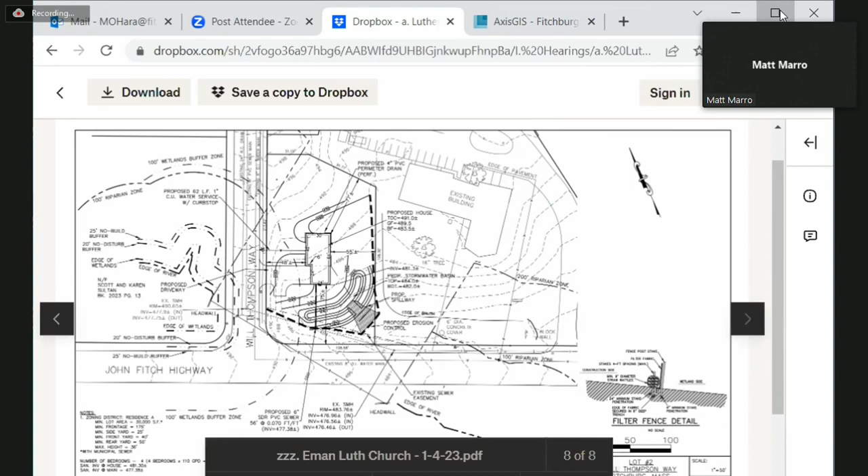At that time, I believe Mike was there also. And then members were there? There were some members - myself, Mark, Dr. Baker, Ralph. So there wasn't a quorum there? Correct, it was not. Okay, I just want to verify that.

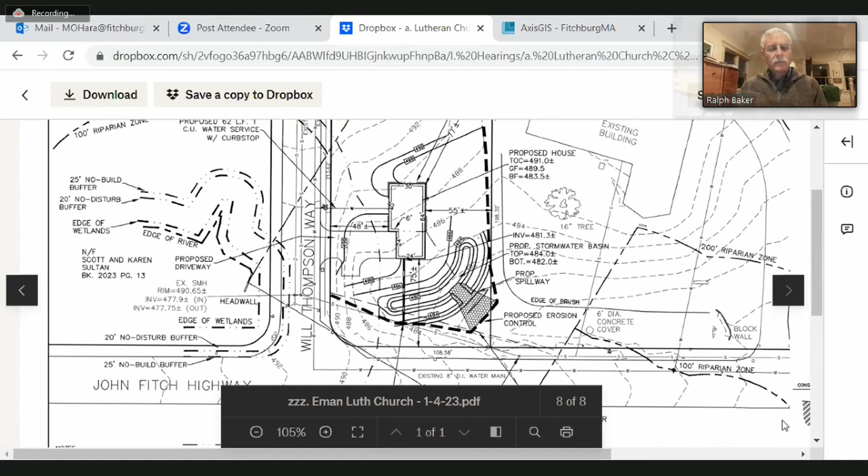I know at that point they had a site walk with the members stated, and Matt and Tim, and in both times Matt visited the property, he did some hand augers to check the soils, to see if there are hydric soils on the property. Tim, at his initial site walk, stated there was some wetland vegetation he had concern about. So there was some back and forth with regards to whether or not there are wetlands there. We did not update our plan to show any additional wetlands on the property, as our consultant, Mr. Marro, does not believe there are any further wetlands on the property that affect this project.

The other item we had to take care of since the last meeting was the stormwater management rules and regulations that the city has. We've been in contact with Nick Erickson, the DPW director, back and forth. I had a lengthy conversation with him this morning to go over a disagreement we had with regards to whether we needed to meet those requirements, because one section says if you disturb less than 20,000 square feet, you do not need to meet the requirement, which we do not disturb greater than 20,000 square feet.

There's another section in the regulation that basically gives the city carte blanche over any disturbance in the city that impacts drainage or waterways of the Commonwealth. So any disturbance that happens in the city, there's a provision in that regulation that Nick says allows him to require us to do stormwater management, even though we don't have 20,000 square feet of disturbance.

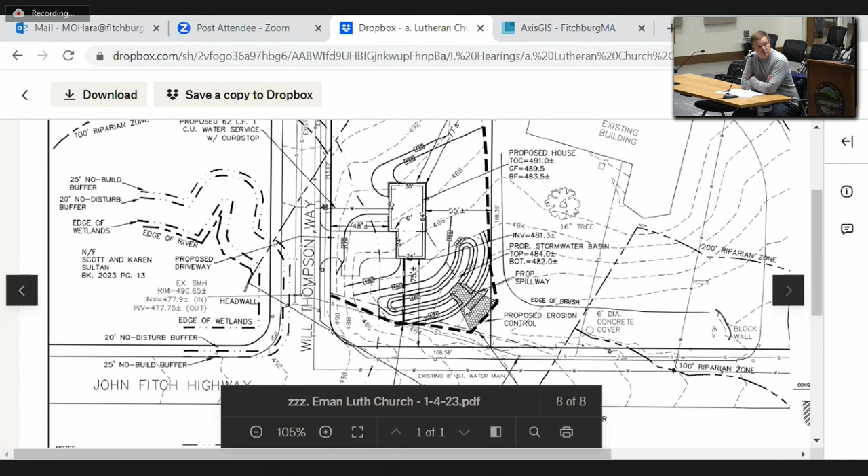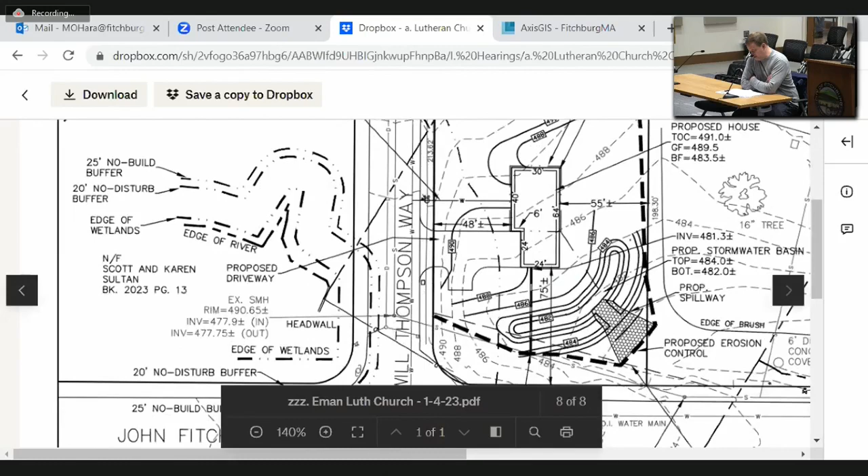Because of that, we updated the plan to what you see on the screen, showing a small stormwater basin in the rear of the property. It's going to be 1 foot in elevation for the greatest storm elevation there. There's a spillway directed out toward the swale on the property of the church, and then toward the catch basin along the retaining wall to the left of the entrance into the church.

Nick asked us to run drainage calculations up to a 100-year storm event, which again we disagreed with, but we did anyway because there's no way we'll get a sign-off if we don't do those calculations, even for a single-family lot. So we did the calculations up to the 100-year storm event to show that we don't have an increase in the peak rate of runoff to that catch basin.

So those are the 2 items that were talked about at the last meeting - the updates to this plan and the site walk that you guys had last week really address those 2 main items.

We will continue to work with Mr. Erickson to make sure he's comfortable with our calculations that we're going to provide him, to show that we don't have an increase in the rate of runoff to that catch basin adjacent to the entrance, at the end of that drainage swale that was part of the drainage system constructed when the church was built.

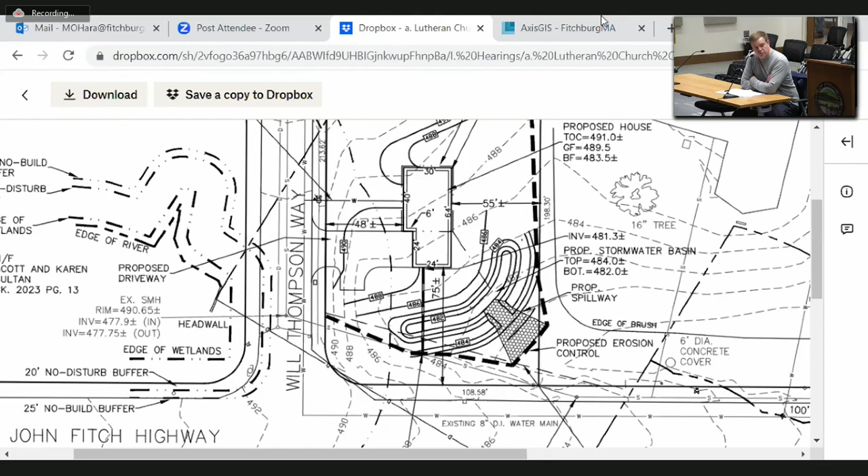So those are the two items. I'm not sure if at this point we want to turn it over to Tim or Matt to talk about the site walk from last week. I know there's still some conversation being had with regards to what was seen on the property and what wants to be protected, even though the soils didn't show being hydric soils. I'm not sure, Mike, if we want to turn it over to them now, or if the commission members want to interject.

Tim, you're unmuted, I believe. Both Tim and Matt, if you have anything to chime in. Tim, you can go first.

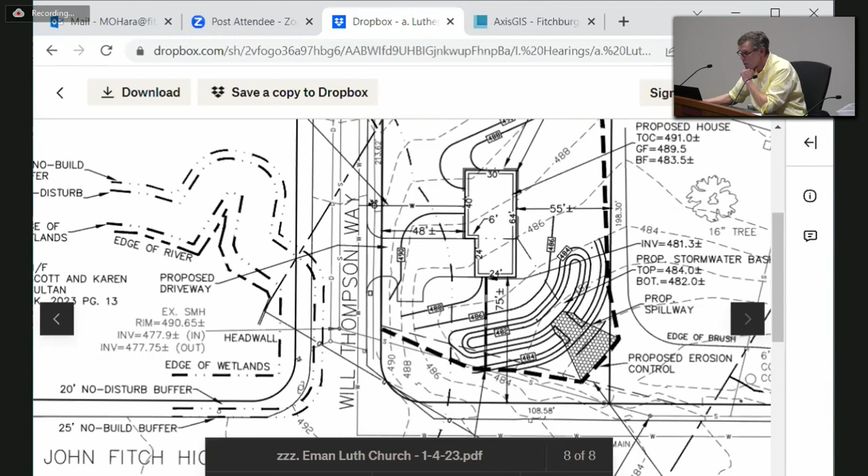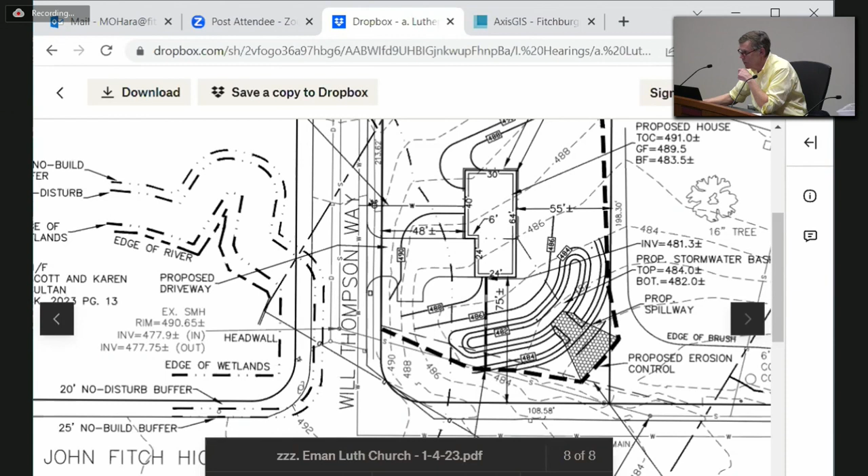I would like to report. We did have several conservation commissioners at the site, but they were observing the delineation. They weren't discussing the project. Unfortunately, we were not able to come to a meeting of the minds on the wetland delineation.

Matt, and I know Matt's going to speak for himself, but Matt agreed that there is wetland vegetation, but it's Matt's position that there's not the presence of hydric soils. We did look at the soils, and I felt that the soils were not conclusive.

There was standing water, and frankly a lot of mud, in an area where silt has accumulated. This area has been disturbed, not only the soil but also the vegetation. It's been mowed for quite a while now, and it appears that the wetland area may have been a man-made drainage basin at one point.

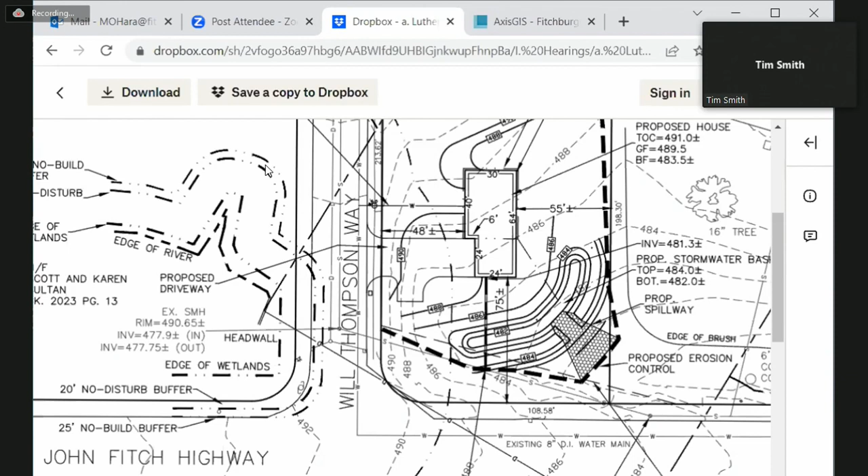Because whenever you have disturbed soils and disturbed vegetation, it's really difficult to delineate the wetlands. But again, there is the presence of wetland vegetation, and even though we didn't observe hydric soils, there's a lot of standing water. I've been on the site a few times, and even the last time I was on, it hadn't rained for a few days, and again there was standing water.

In fact, there's a catch basin there, so they wouldn't have put a catch basin there if it wasn't a really wet area. And the wetland area isn't even mowed, and I suspect it's not mowed because the mower would sink into the mud.

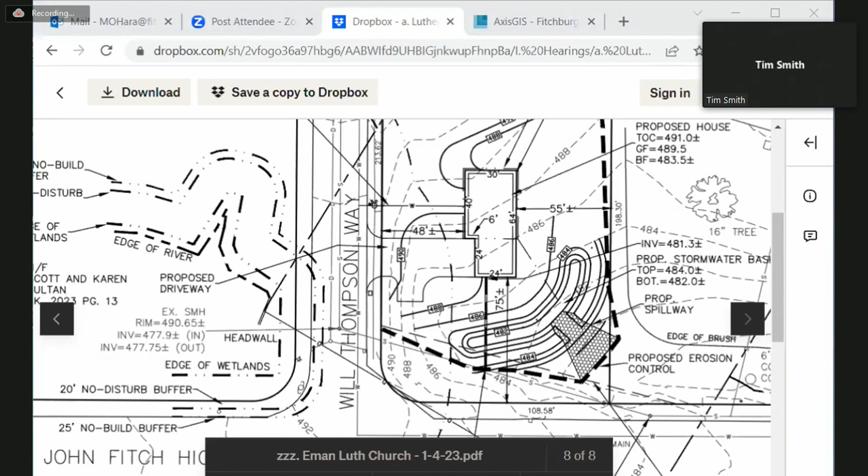So we really focused on the area along John Fitch Highway, parallel to it. But at the very end of the meeting, we found an area going up the hill that we followed, a wetland area, all the way to what I'll call a ditch that goes around the parking lot.

There's actually on the parking lot itself several inches of ice buildup. It's pretty clear that area is receiving water from above, possibly off of Rinnock Road. But there's a pretty decent flow.

You do have a ditch, and it's quite possible - one of the things Matt pointed out is that ditch was probably installed when they built the parking lot, to drain the water away from it.

That may be the case, but if you look at the definition of a stream in the regulations, it definitely has defined banks and hydraulic flow. It meets the criteria for an intermittent stream. And if you've got an intermittent stream, then any adjacent wetlands is BVW, bordering vegetated wetland.

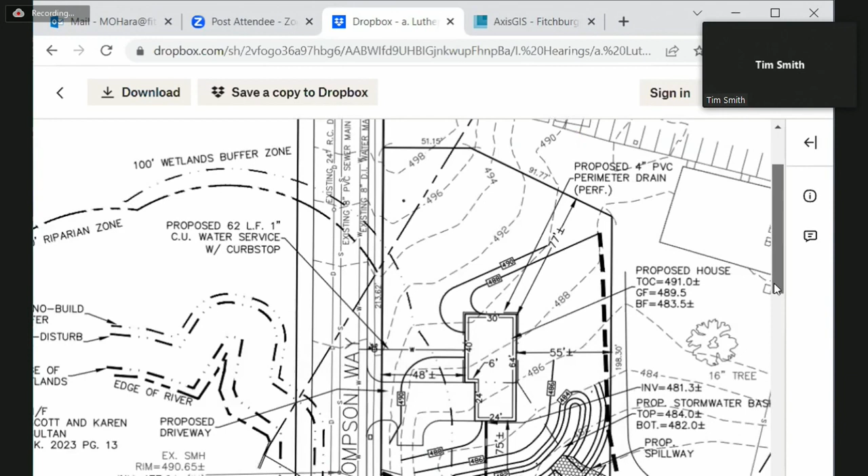So it's my recommendation that that area be defined as a wetland, and again, I'm not in agreement with the applicant's consultant on this delineation. I don't know if Matt wants to comment at this point.

Well, in looking at the area, we did some digging. I know Dr. Baker broke out his spade, and what we still found, even under some of the accumulated silt, especially in the areas close to the subject lot as shown on the plan, was not hydric soil.

We did agree that in the areas going closer to the catch basin, there's a potential it could have turned hydric. It's hard to tell - the area has too much water on it, and it's kind of cloudy as far as getting a good reading in that area because it's under street canopy.

It'd have to dry out a little more so I could take a look at it. But the area would not reach all the way up and go up the hill. There is a channel dug on the side of the parking lot that was dug for drainage.

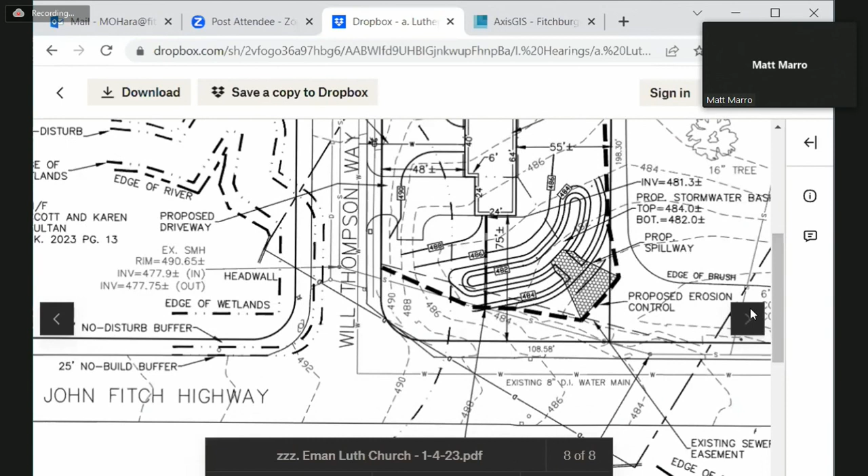The vegetation there - there was some facultative vegetation, but it was not there in sufficient amounts. There was just as much upland vegetation, like staghorn sumac and poplar trees. So the vegetation makeup there definitely isn't sufficient; in fact, it would be very incongruent with a wetland.

The definition of wetland does allow the applicant to present the soils data to show that the area does not support that type of perennial hydric condition.

So my conclusion is that the area immediately adjacent to the lot is definitely not wetland. Downstream, it's still indeterminate because of the amount. However, it is pretty apparent that that area was constructed with the church as a detention area.

If you looked at the parking lot, you would see that there's a lot of water that flows down there. It's coming out of the hillside, coming from up the hill. That area is basically at the bottom of the hill, so it was graded and made with a catch basin in it to empty water coming off the hillside.

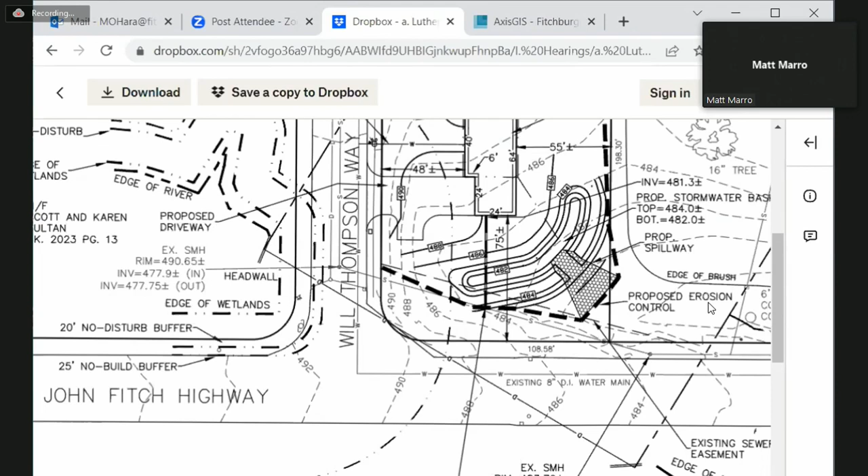Detention basins that were built aren't supposed to be regulatory as wetlands. So that brings another caveat into it. You don't have just as far as the stream definition and the channelized flow.

I understand where Tim is coming from, and yes, that is a clinical definition, but there's a lot more writing on it than just what is in a definition. There are multiple definitions that are created to eliminate this type of confusion, especially the definition of a detention basin. That area was built to handle stormwater runoff and melt. That's what that area was for.

And believe it or not, that was my Reader's Digest version.

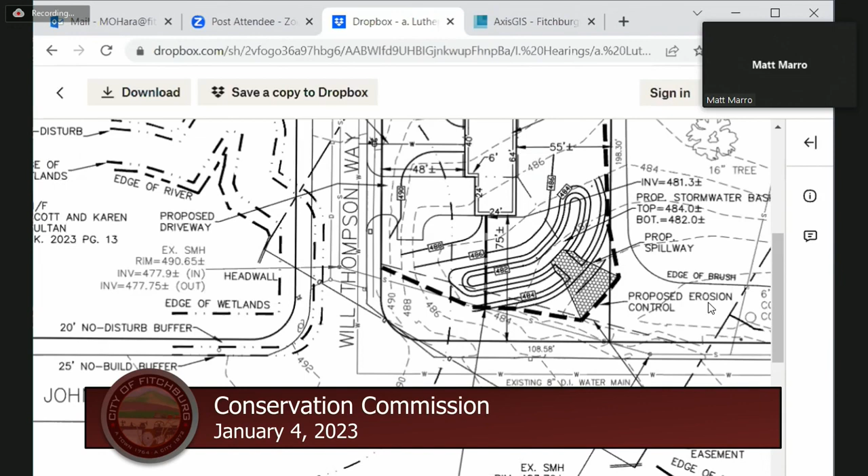Any commission member, can you hear me okay? Yep, no, we got it. Yep. Any commission member want to chime in? I would like to speak. Ralph, can you hear me? Ralph, yep, hear you fine.

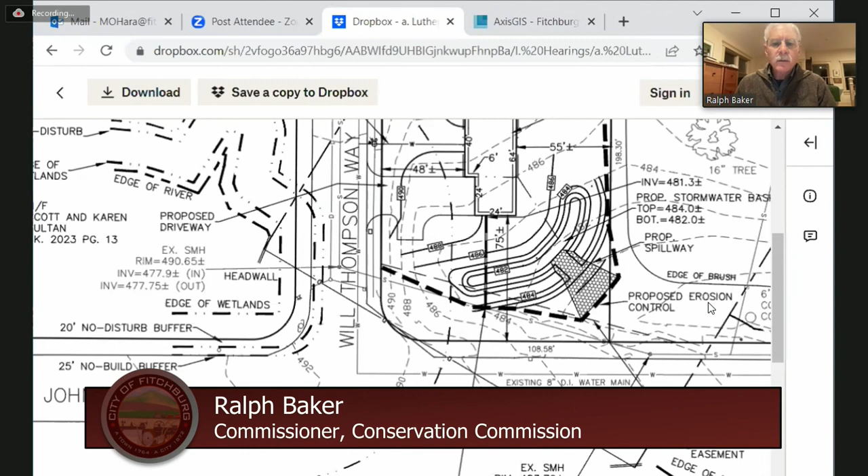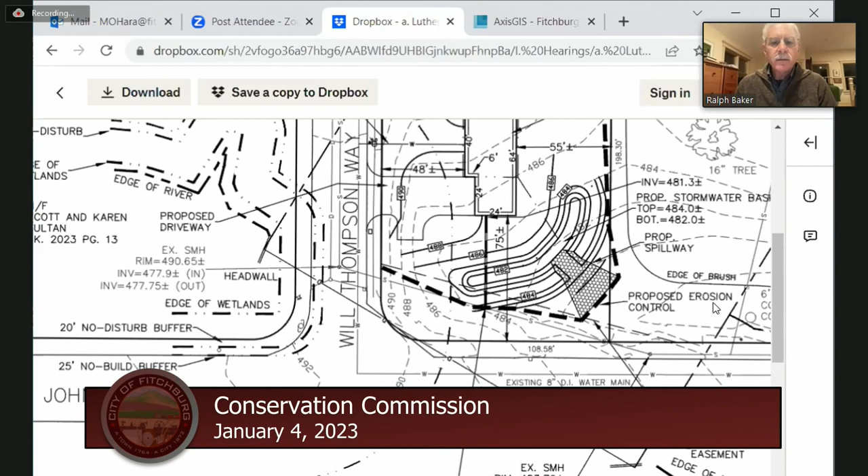So I don't disagree with what was said, except that I do feel, as Mr. Smith mentioned, that the ditch, which has had water flowing through it, which lies just to the east of the proposed east lot line of lot number 2, is and should be delineated as an intermittent stream. It's functioning that way hydrologically, and hydrology is one of the criteria for what qualifies. So I think it should be delineated as such, and I don't think it would necessarily interfere with the proposal, but it would make the application complete, and it will need to show the associated buffer.

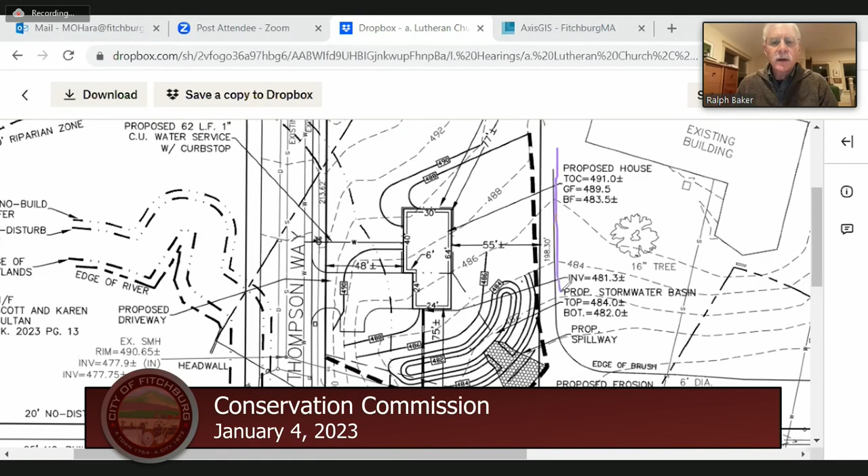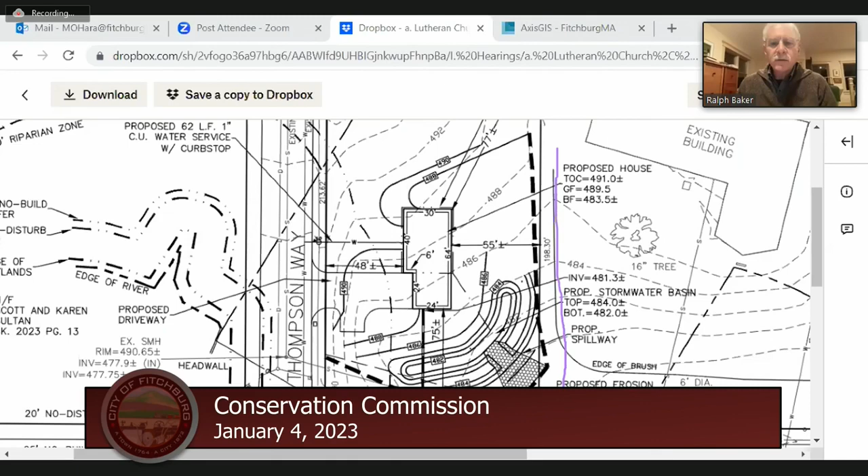Mike, that's a good depiction. I was guessing, but from the lot lines, good, from the contour lines, you could figure how that was, how it goes, and it actually goes through Lot 3 where it begins. But that's outside the map that you're showing. It kind of bends around to the left, up above, toward the rear of the backyards of the houses. It doesn't actually go across the parking lot the way you show. It bends where that 490 topo line has a bend. That's where it's flowing, and then it goes up that way.

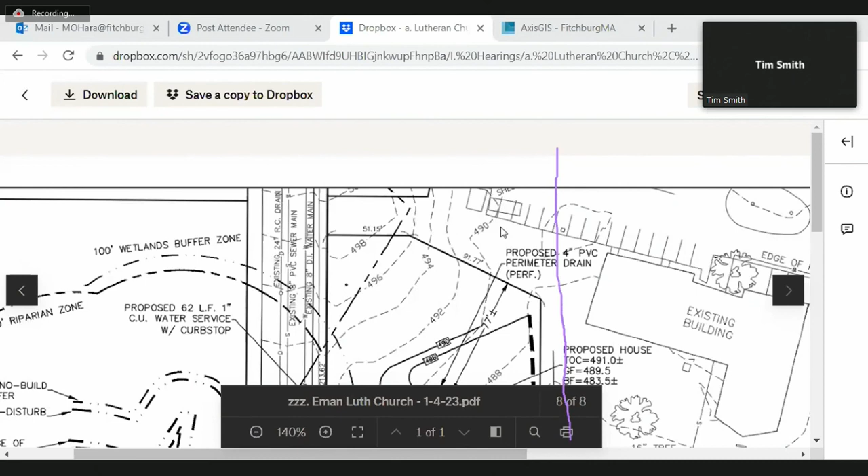And just to point out, Ralph, Dr. Baker said something interesting. He said he agrees that even if this is a wetland resource area, it doesn't eliminate the ability for the proponent to build a house where they're showing it being built. We may be able to move the house, but I think the real issue here is if the commission says it's not a resource area, that was to prevent a homeowner in the future from filling that area in. Everybody agrees that basin area does provide for the interest of the act, right? It does provide for flood control. It does provide for storm damage prevention.

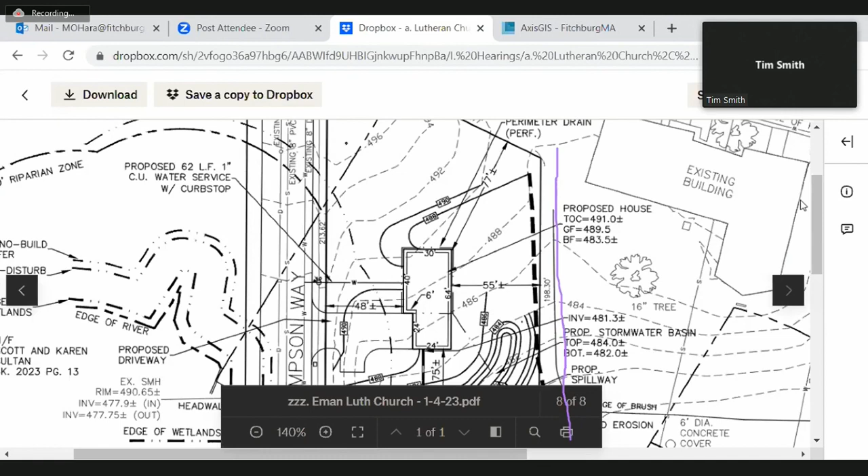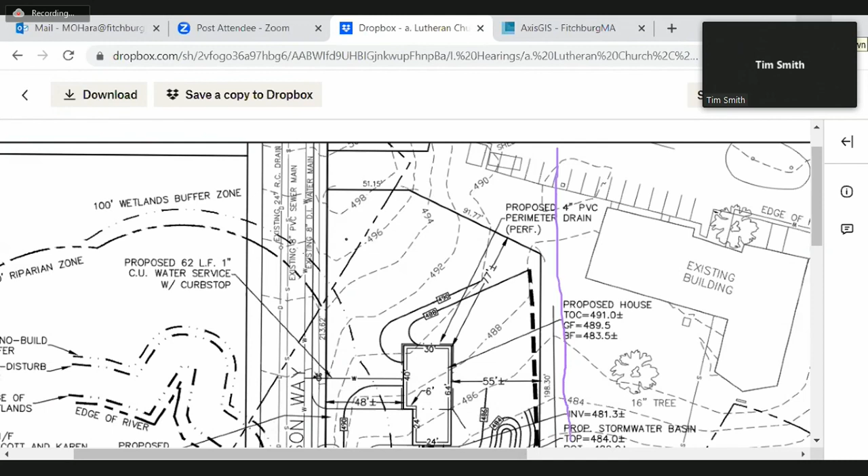It provides for pollution control. So it serves some of the interests of the act. That parking lot, for example, that the church uses, appears to be heavily salted because water does build up there. That salt otherwise would get into the brook across the street and across of John Fitch Highway, and to some extent having the water flowing over this naturalized area mitigates that. So also protection of fisheries.

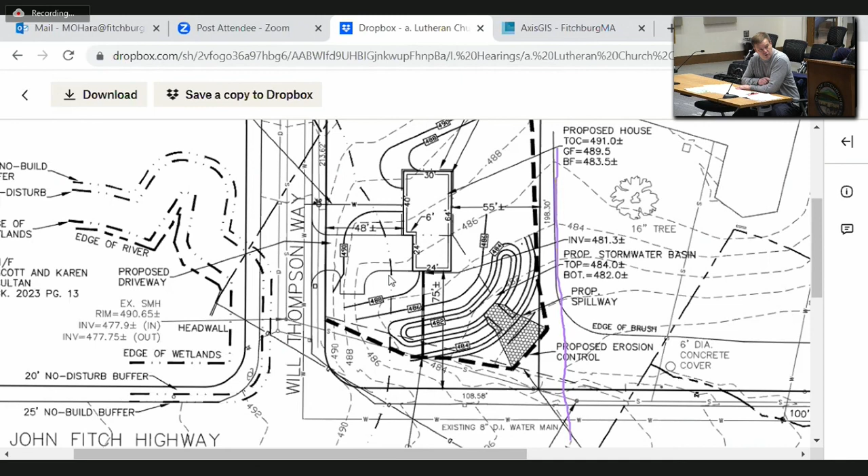If I can interject for a second here, Tim and Matt, to kind of back up Matt's point of view. I have a rough copy of the design plan when the church was put in, from 1974, and I can give it to Mike, the copy I have here, that shows that drainage channel that was constructed as part of the drainage to get the drainage around the parking lot, to back up what Matt was saying. And it shows the proposed drainage adjacent to that retaining wall. If you pan a little more to the right, Mike, to the entrance of the church.

Let me get the right arrow here. Yeah, there's a block wall there, and then also a catch basin or a drop inlet adjacent to that, right next to the driveway.

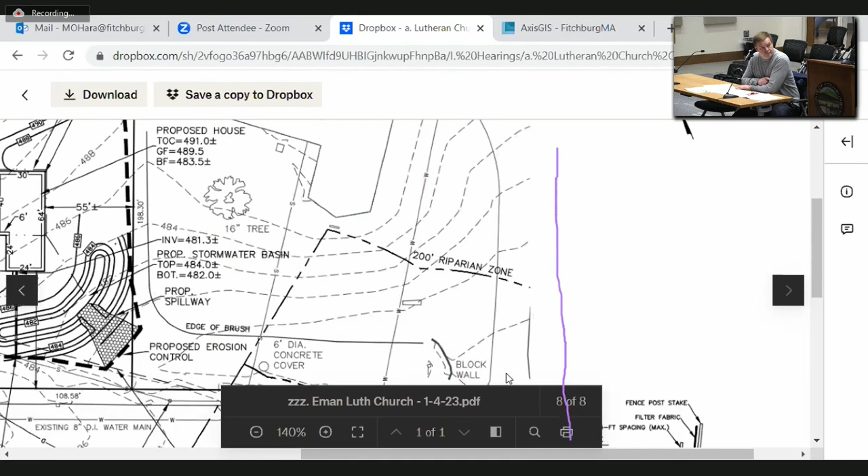This plan shows all of the proposed drainage in that area, along with what Mr. Marro was saying. This was all designed and put in place to handle the stormwater for this property. So if we were to deem this a wetland, how do we continue to maintain it as a basin? The intent here is to be able to clean that area out if silt backs up into that drop inlet. That's actually something Mr. Erickson and I spoke about today, specifically with Lot 2 regarding the new proposed stormwater basin, and who has the operation and maintenance responsibilities for that.

A Lot 2 homeowner would have that responsibility. But he also wanted to make sure that the church continued to maintain that drop inlet and swale so that there's no drainage issues on this property. The church has no problem continuing to do what they've been doing, which is maintaining that area.

I had a chance to talk with a representative from the church today about this area. Years back, they decided to stop mowing this area to leave it as more of a natural area, where they were mowing it before. On the plan we show an edge of brush where they do mow now, and everything beyond that is more natural. You can see there's not a lot of mature growth there, because before they were mowing and maintaining it. It became too much for them and they stopped maintaining it, and that's why it's grown in the way it has.

And they forced the stormwater in that direction. So what I can give Mr. O'Hara is the plan, and I can show the other members this plan, but it clearly shows a drainage channel around the parking lot directing the stormwater in that direction.

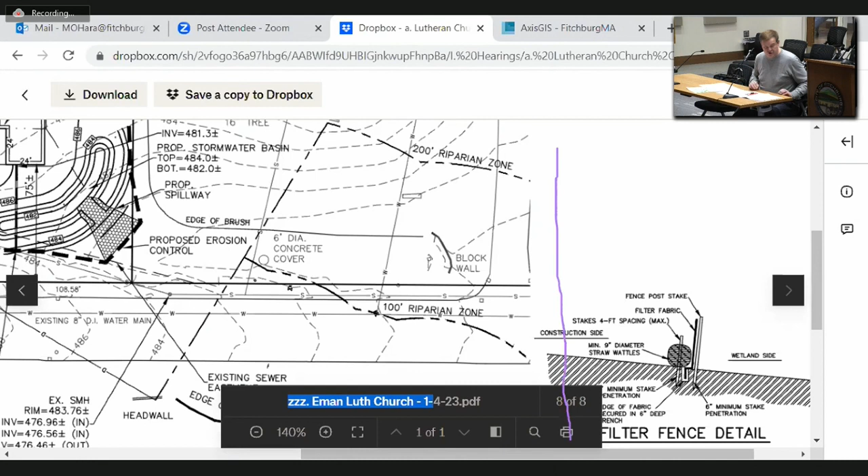When Will Thompson Way was put in and John Fitch Highway, when all that work was done at that intersection, some of this additional swale work was done then too. That's kind of why we have the work the way it is currently. They culverted that perennial stream at the time underneath Will Thompson Way and John Fitch Highway, put that under there, and then that swale was the remnants of all that construction, part of the drainage of all that area.

And yes, it does receive a fair amount of water, but I think I looked at it, it was 0.02 square miles of an area that goes to this area. So there's water, but it's not anything of substance that goes there. But I can show you this plan at least.

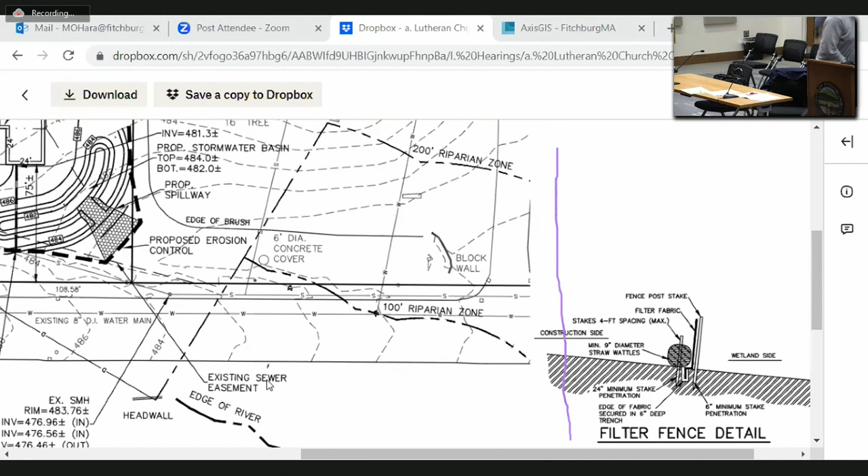Is that the original or a copy? Copy. Okay, good. I will send an email with a copy. I can, yeah, sure, send it to the members.

Do any other commission members have a comment? I have a couple of questions for you, Wes. Is Nick Erickson online? Yes. I'd like to know if his questions and discussions this morning have been satisfied. I think you're unmuted there, Nick.

We have not sent them over the calculations as of yet. We literally had a conversation, it was like 10 o'clock, maybe 10:30 today. So after I had the conversation with Nick, we've been working, trying to get all those calculations completed. We have got them completed, I just haven't had a chance to put them together in a nice, neat package for him to review. But the plan that we provided you tonight is what we're going to provide him to take care of that issue.

Yep, thanks Wes. This is Nick Erickson here for the record. So Wes is correct, we did discuss this morning. We agreed to disagree basically on his stance versus mine regarding the actual applicability of the stormwater rules and regs. My opinion, my stance is that when we crafted the stormwater ordinance and the accompanying rules and regs document, we added in some language as essentially a catch-all, like Wes described, to allow the city some latitude to address drainage for projects within problem areas.

And because this is tributary to the Baker Brook flooding issue that we have down on John Fitch Highway, that's kind of the qualifier in my view for taking this project to this level of detail.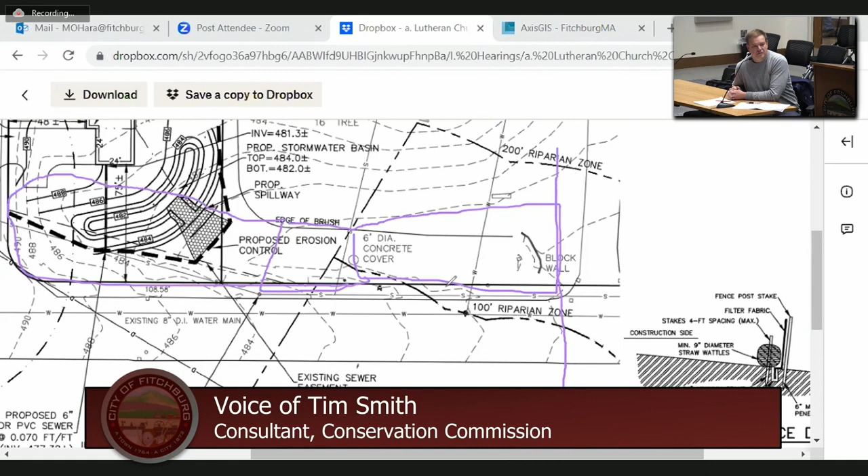Correct, yes. So, say it's not wet. The stormwater was directed around the parking lot toward this area, and then when the driveway was put in, it cut off the natural flow path back in 1974 when they constructed this. That's why that catch basin, or drop inlet, was put in there, to basically create a detention basin, and there had to be a positive outflow there.

Right, and a lot of impervious area was added too, and that creates more runoff, which we don't disagree could cause a wetland to be created.

But I think you're making a reach on where the wetland needs to go. If it's going up the swale along the driveway for the parking lot, I think that's a reach because that was a man-made swale, and then the water was directed that way.

But just because it's a man-made swale doesn't mean it can't meet the criteria for an intermittent stream under the regulations. If you disagree, show me the regulations, show me what the language is. There are stipulations in the Wetlands Protection Act that allow for maintenance of swales, and it states that right in the BVW section regarding stormwater turning into wetlands.

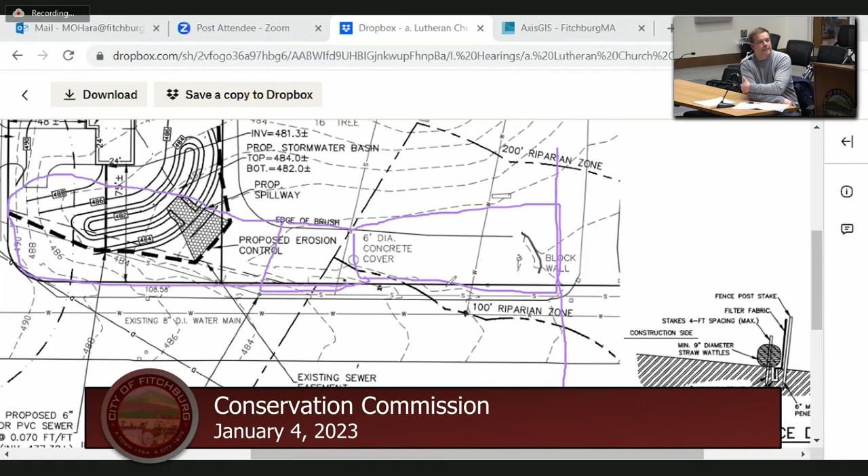And on top of that, Tim, were there hydric soils there? No. So it's not a wetland. Well, can we ask Matt that question? Matt, did you look at the soils as you go up the hill and around that parking lot? Yeah, it's the same thing we found when we were out there, there were no hydric soils in that area. It's the same thing.

Can you hear me okay? Yeah, we heard you, Matt. Sorry about that, and sorry about the dog.

I have one more question about the new plan, where the drainage basin exits onto what's now or going to be church property. There's a bordering line there. How are you dealing with that? Because you're just dumping water onto somebody else's property, as noted in Mr. Erickson's report. Going forward, if the church doesn't own that property later, what happens?

That's part of the operation and maintenance plan. Those things are going to be talked about in there - who has the responsibility for the operation and maintenance of this basin, and who has the operation and maintenance of the swale below that and the drop inlet. That's some of the stuff Mr. Erickson wants cleared up, and we're going to provide him the operation and maintenance part of it.

As part of an order of conditions, if the commission deems they want to grant one, you can put language in there specifically saying the operation and maintenance for this basin goes to the responsibility of Lot 2. And the operation and maintenance of the swale below it and the drop inlet goes to the church, or its future homeowner or future owner of that property. There are ways to handle that within an order of conditions, and the church has no problem with that being a condition of approval when we get to that point.

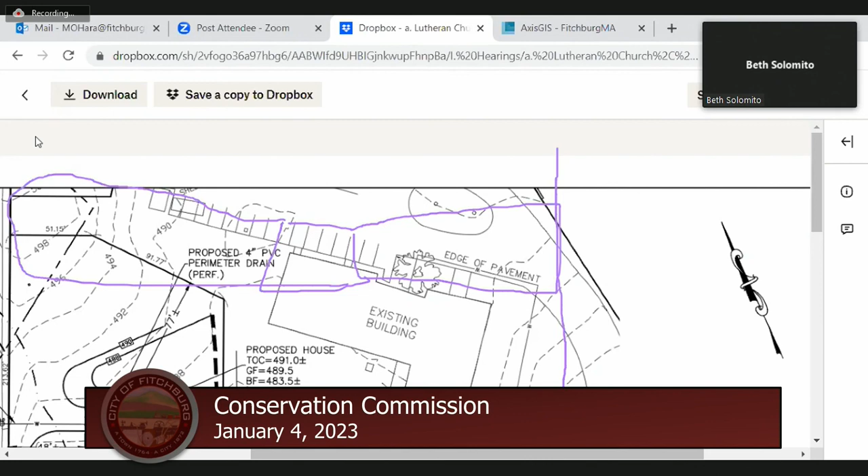That might be just wherever it's proposed when it comes time to apply for the building permit. They sent something that was attached into this email originally.

So folks know, there was a plan showing two proposed lots to be split. This one is the concern of the commission tonight, and then another conforming lot further to the north along Will Thompson Way. That has been submitted to the planning board. It meets the frontage and area requirements, so they're obligated to endorse it, but that hasn't happened yet.

So I just have one question. Can we, Wes, Nick, Tim, Matt, everybody get together and come up with some kind of consensus that is constructive for us to make determinations, rather than everybody having their own opinion? It makes a very hard decision for us. We would rather see all the engineers work out whatever issues each has and come up with a presentation to say, here's the basin, and Nick is okay with that. Here's what might be delineated as a transitional area between Tim and Matt, and present the plan that way for us to approve or deny.

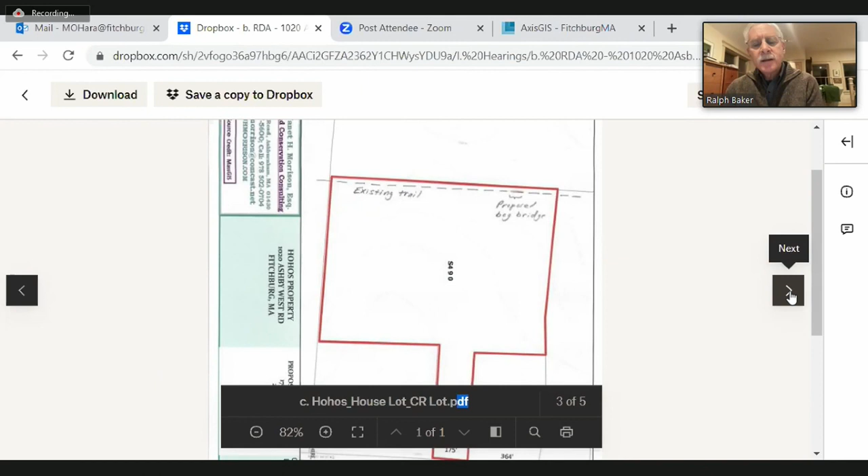Let's see what else — if you flip to one of the other figures, Mike. The sketch of the bog bridge? Yeah, sure. The design is very simple, a very common type. This shows two sleepers, 6x6 pressure-treated, set on the ground, and two 2x10 planks, 8 feet long, set on top of the sleepers. This will be repeated with 8 other sets to make a total of about 64 feet of bog bridge, which is what I'm proposing to do there.

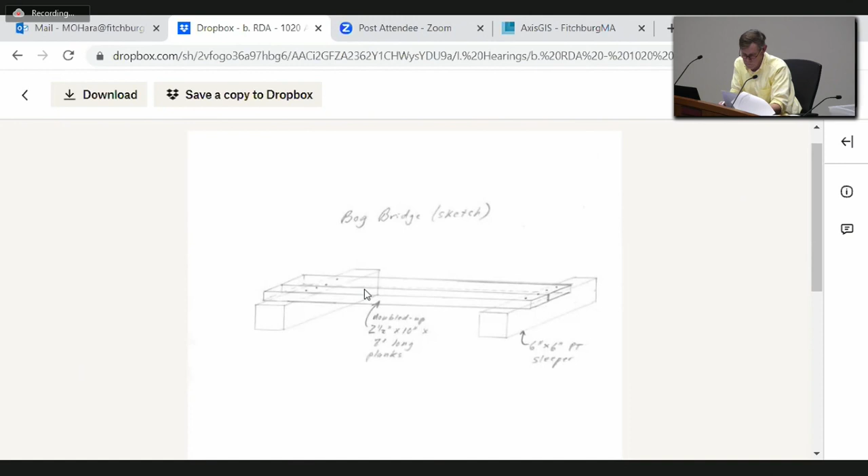Reading from your RDA, Ralph, the narrative — so you don't dig down at all, you just simply place it on top of the existing ground, right? Correct, it's a common way of building these kinds of bog bridges.

One question I have — I think we've talked a little bit before about this — but pressure-treated lumber, is that still an issue of leaching chemicals out into the environment? It's not believed to be, based on my understanding. This kind of pressure-treated lumber, which is fairly recently purchased, has micronized copper azole in it, which I think is quite stable and is permitted to be used in this kind of direct ground contact application.

Commissioners, any comments or questions? If I could, this is Tim Smith, just a quick comment.

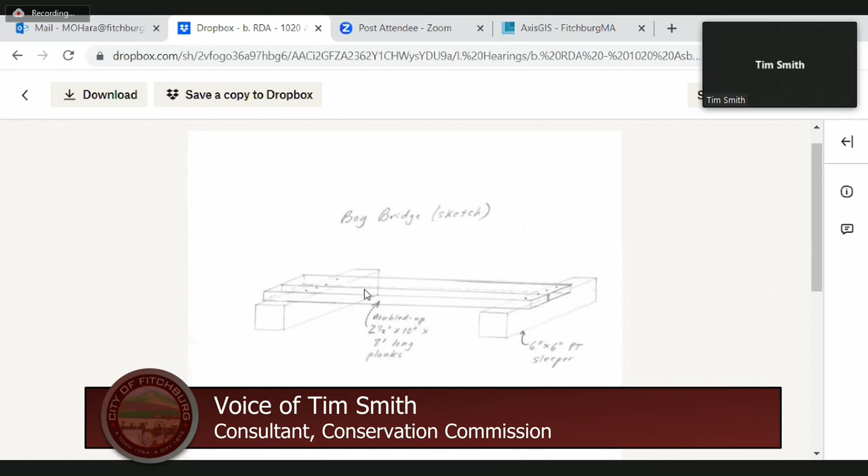The regulations under 310 CMR exempt certain minor activities. One such exemption, reading directly from the regulations: the following minor activities, provided they comply with 310 CMR 10.02 2B1, are not otherwise subject to regulation under Mass General Law, referencing the Wetlands Protection Act. The first minor activity listed is unpaved pedestrian walkways less than 30 inches wide for private use, and less than 3 feet wide for public access on conservation property. So there is an exemption for unpaved pedestrian walkways less than 3 feet wide for public access on conservation property. Just wanted to point that out.

Thanks, Tim, that's good to note. Thank you, Tim.

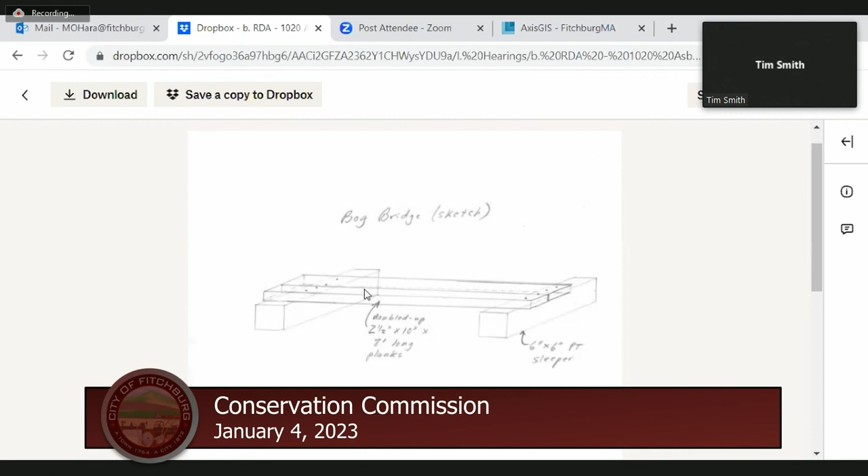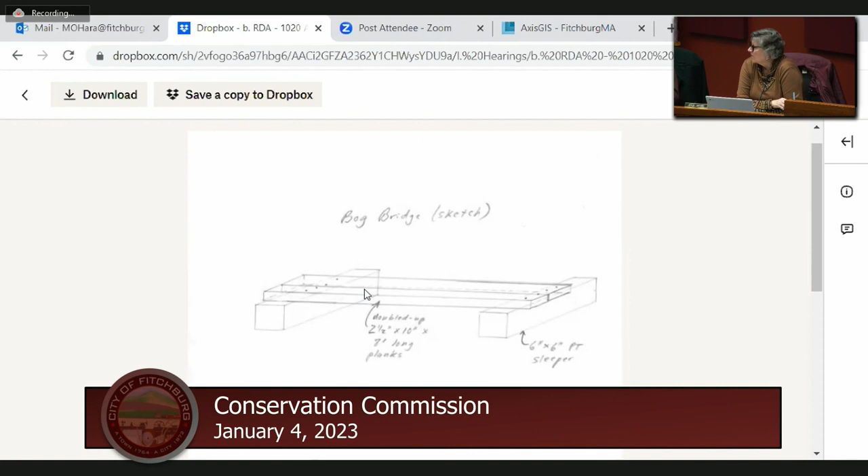Any other comments from commission members? Nice. Mary? Anything, Mike? So Ralph has recused, so you're down to four. Is there any comment or a motion?

I think if there isn't any additional comment, I'm hoping I'm phrasing this right, correct me if not, that I would motion for a negative determination for 1020 Ashby West Road. Second.

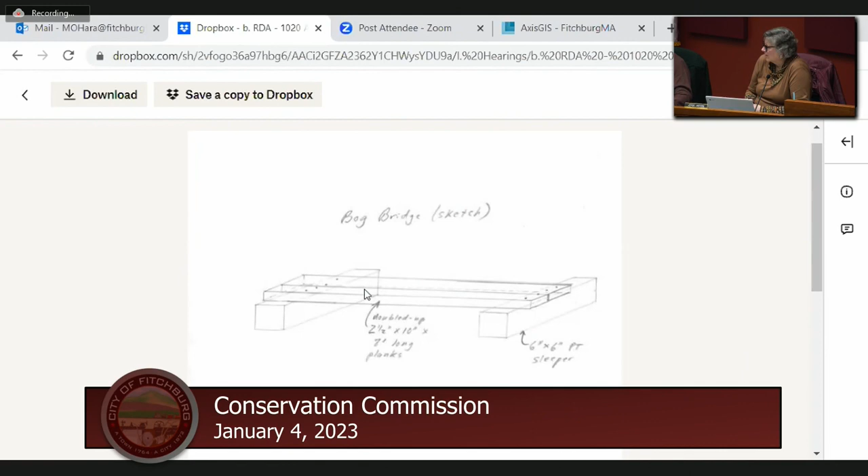Okay, thank you, Ralph. Thank you, guys. I appreciate it.

So for the record, let's show that Ralph is rejoining the meeting. And two, other business, which is Tim and Justin, Rydemore heavy-duty truck parts on Benson Street and Battles Street.

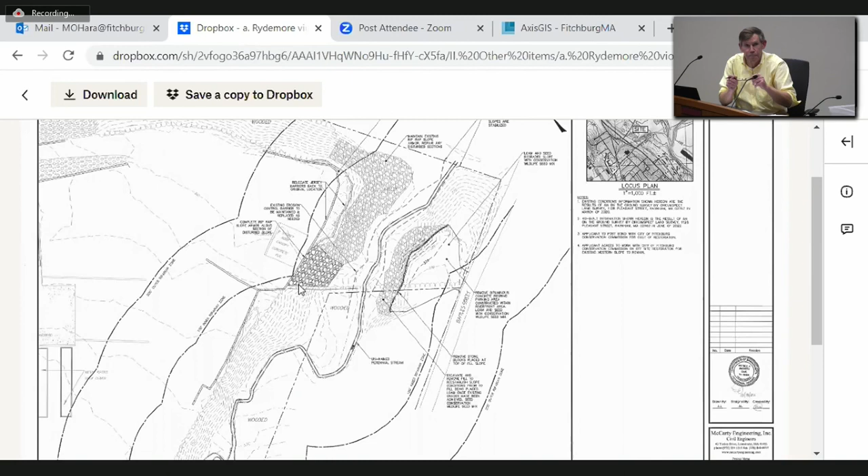The riprap we were going to leave there to stabilize it. Yes, on the Benson Street side, you were going to add the riprap at the far end where it was starting to degrade, move the bin blocks back to their original location, and we'll have to look at stabilizing any other areas that need to be addressed.

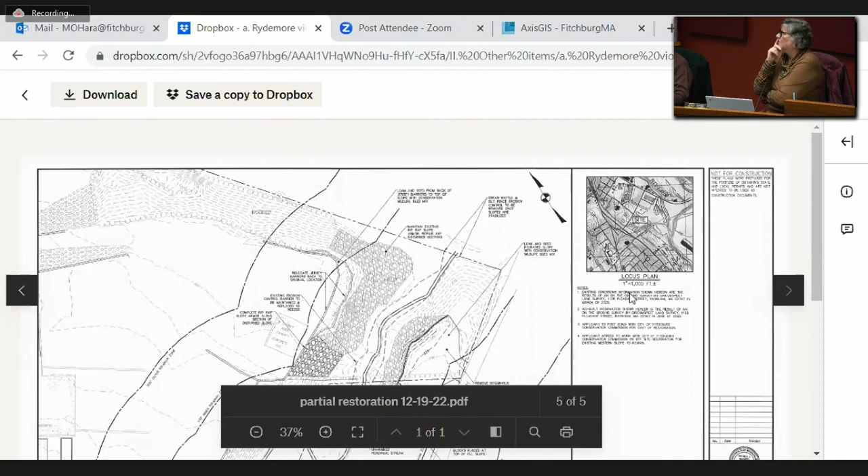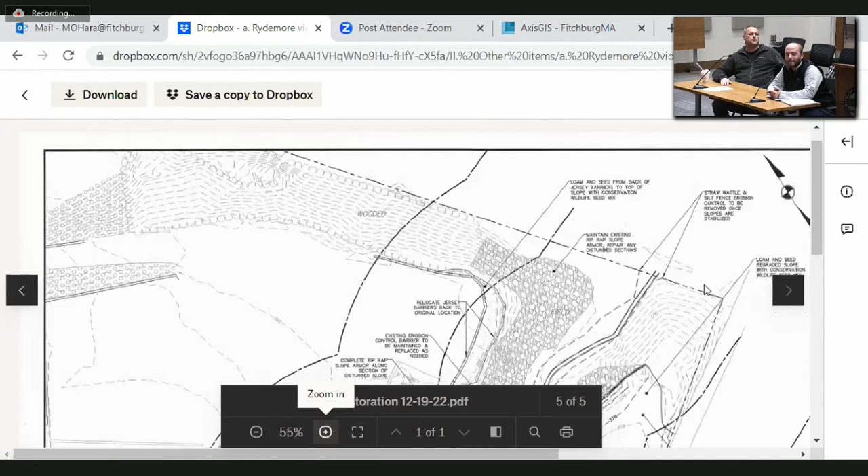On the Battles Street side, that was full restoration, coming out completely. If you look at the plan Mr. O'Hara has up right now, where the 2-story roof canopy is, there's a darker hatch that circles - that's the proposed riprap extension. The commission had an issue with potential erosion behind there, so we would be proposing to complete the riprap along there and restabilize that part of the slope.

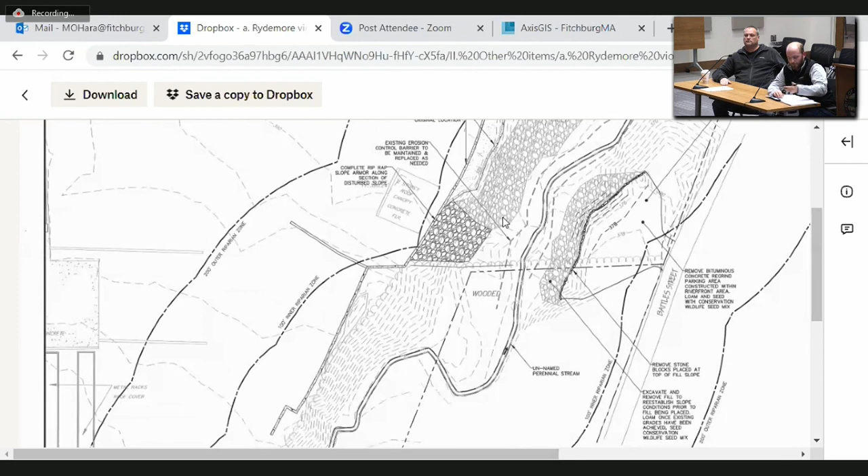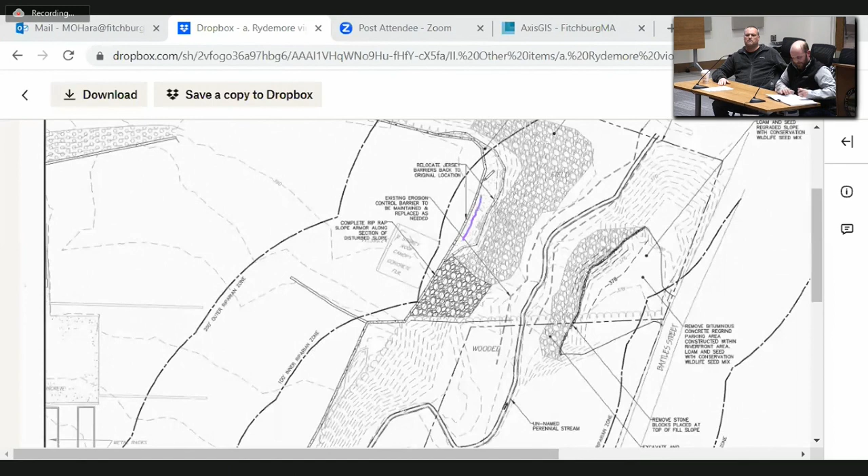We are proposing to move the barriers back to the original position as shown on the existing survey, and between the relocated barriers and the top of slope, we would loam and seed that area, bringing it back to natural vegetation. Probably about 8 feet, because the bank on the other side of the barrier goes back further than where the block actually is. The block itself probably only needs to come back about 8 feet, but if somebody wanted to walk over there, I'd be more than willing to show them.

We may stop by to take a look at that, and I'd like to be there when you're there. I'd love to meet and show you, and that way if there's something I'm missing, you guys could share your opinion. So just so folks know, Tim, the first building you come to is 150 Benson - the closest one to the rail trail is the one with the offices on the back.

So what I tried to shakily outline is about the area that's to be restored. You're saying the area to be restored - on which side are we talking about? That's the loam and seed area, from where the barriers are going to be moved back to the original position, up to the top of slope. That's what would be loam and seeded and restored.

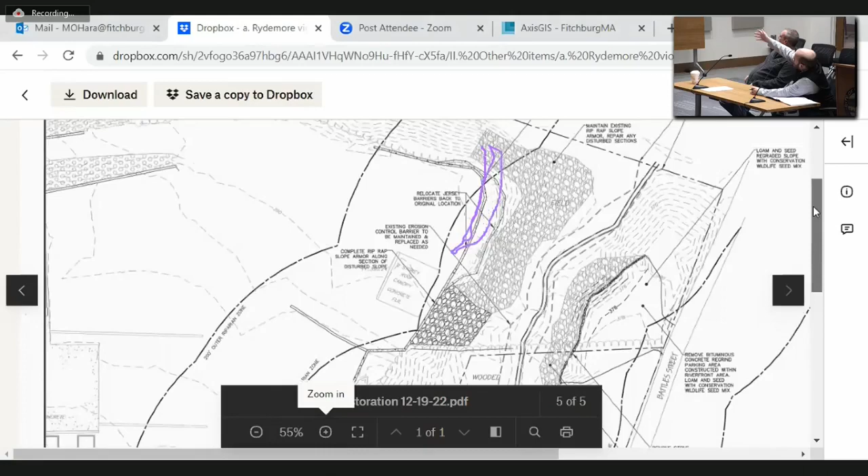It's about - well, now that it's moved it's a little different, but it's relatively close in that area. I think we might want to come and look at that, because I was thinking it was a little bit more than 8 feet. I could be wrong a little bit, but let's look at that and agree upon where that demarcation line is, where the bin blocks are going back. We can take a can of paint, mark the ground, and have the blocks moved so you'll know. It's that easy.

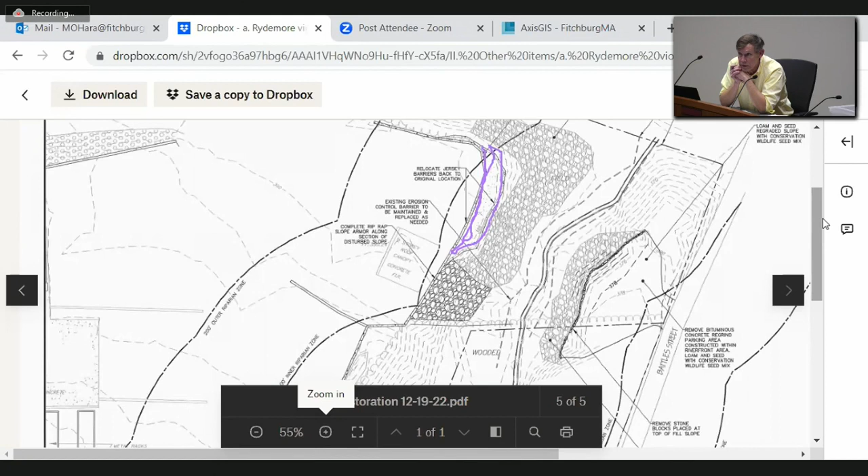One of the other items discussed last meeting was to continue the discussion about what kind of restoration, maybe off-site. Do you folks have any ideas? I think last time we left it, the board was going to come together and have some ideas of which direction. I'm more than willing to work with everybody and help restore another area that needs it, but I can't be the one to pick that area out.

I certainly know that further down from where I disturbed that area, it does look like that needs some attention down there. If somebody wanted to do an on-site visit with me, I'd be more than willing to show them that area - the machine's going to be right there, it doesn't have to be moved, and it is an area you can see that needs to be addressed. Which area down? If you go to the bottom of Battles Street, where Leominster came across and did their pipe.

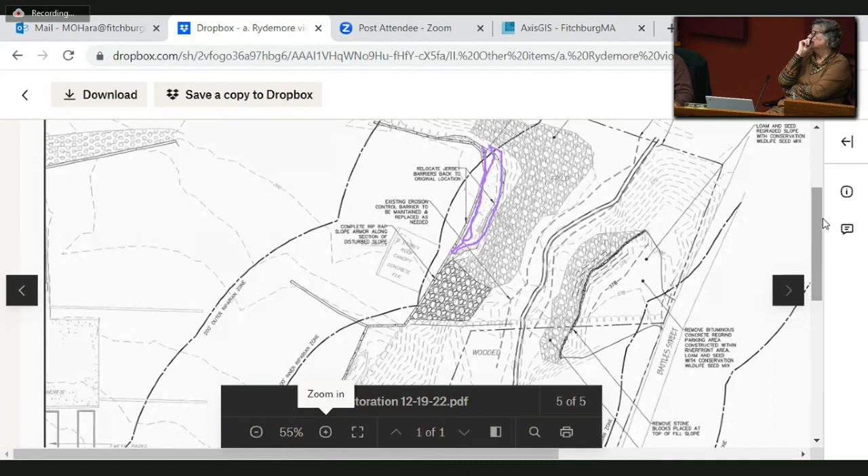There was no riprap in there - you can see it when you go down there. I'm not trying to point the finger the other direction, but that to me seems like it would make the most sense. But if you guys want to do a different area, I'll work with you. As part of my site visit originally to come out and inspect that, we did drive to the bottom of the hill, and I did make a mention of - do you know why this is this way? Because it is not in good shape.

Logistically, if the commission's looking to the applicant to restore a site physically and have equipment out there, the logistics of it being at the bottom of the hill from where he is going to be restoring the Battles Street side of his property would make the most sense. You're talking about moving a piece of equipment down about 100 feet.

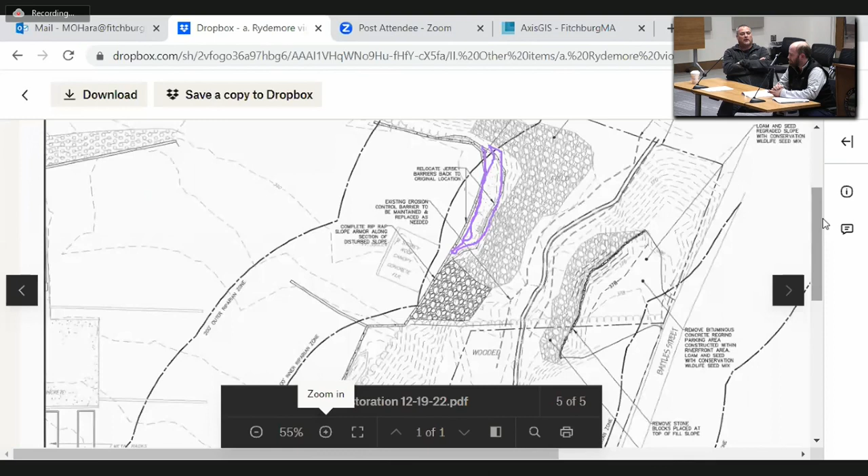Do we know who the property owner is close to there? I am not too sure. As far as I know, you have the ambulance company that's right in there, and the city of Fitchburg, and must be Leominster that owns that section of land right there, because I saw it on a map before. But which one, who owns which, I'm not sure.

Because I think it was Leominster's equipment that was down in there working, if I remember. They were working on a water line, yeah, replacing water line. So then I'm not sure that that would be a feasible spot, because we technically would be restoring Leominster.

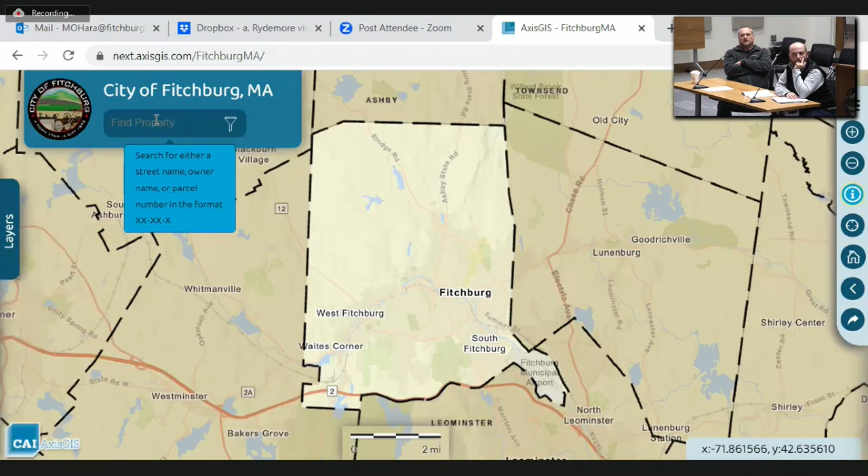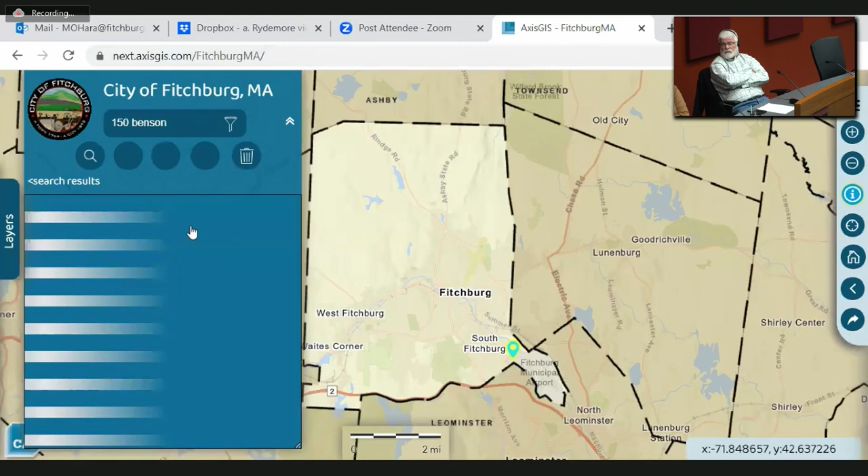But is your property on the other side of that where it's still going to affect it? Yeah, that I don't know. I'd have to look at the map. Leominster owes us their own restoration, and he could do Fitchburg's. So he doesn't have to do one, but Leominster owes us. If it's degraded, they owe us.

Right now, I'm not sure that we're ready to make a determination yet, and my recommendation would be, because I think we really need input from our chair and vice chair, who are not here tonight.

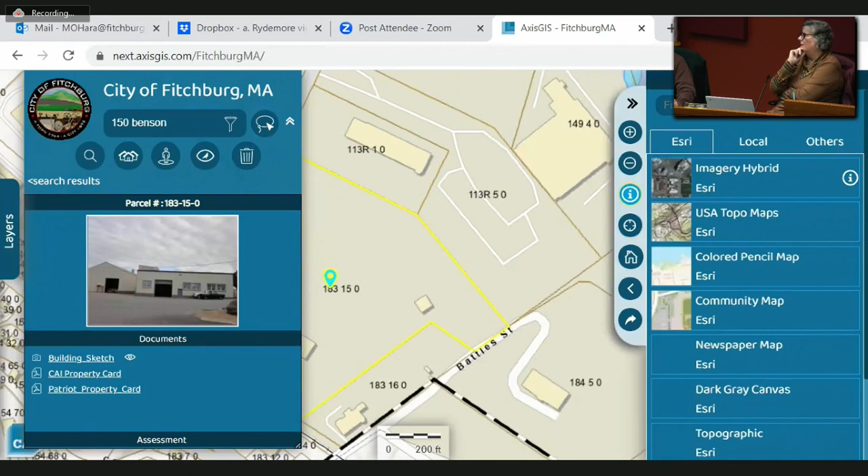Beyond that, in the same area where you are, right on the other side by the rail trail, it's a mess in there. Whereabouts is that? Because I cleaned out a lot of that. Just as you walked down the rail trail and you look down to where the culvert is, people were dumping it in there.

Understandably, sure. But I don't know that that's such an issue, I mean, I can get guys down there to clean it out, because I've probably taken out 2 40-yard cans full of rubbish throughout that whole stream area. I've cleaned it up numerous times.

If I go in there and clean it up, I'm more than willing to do that. And I would also volunteer to put up a fence so it doesn't keep happening. Because this is a continuous thing, and I keep cleaning it up so nobody ever points the finger at me saying it's my people putting it over there. So I'd just assume if we got to put up a fence in that section, because people come down the trail and dump it off. It just never stops.

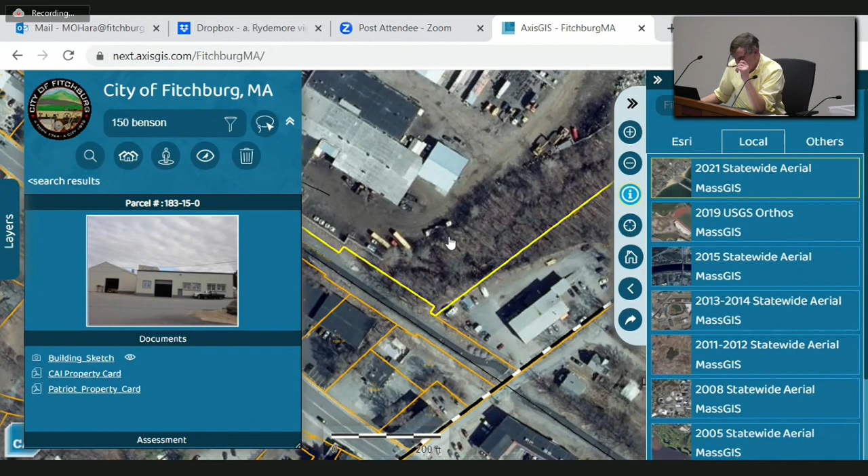Understood. This is the area we're talking about. Here's the rail trail, and there's a little bit of an area right there, and landscapers were pulling up there at one point and just dumping all their landscaping down there. Yeah, there's logs and tree cuts, you can see they're cut exactly, pieces of tree.

So you'd be willing to put some fence in there? I'd have to look at it and get a cost on it. And as long as you work with me over a reasonable time frame, I'd take care of it. I mean, if you expect me to put it in tomorrow, well, the ground's freezing, but if you gave me from now till the middle of summer, yeah, I'm sure I can achieve that.

Okay. And as a matter of fact, I'm going to have to do the same thing in the area we're digging out, because that was another area that everybody was dumping on. From the Battles Street side? Yeah, where I made the level area over there, that was a dumping site right there. People were bringing everything in.

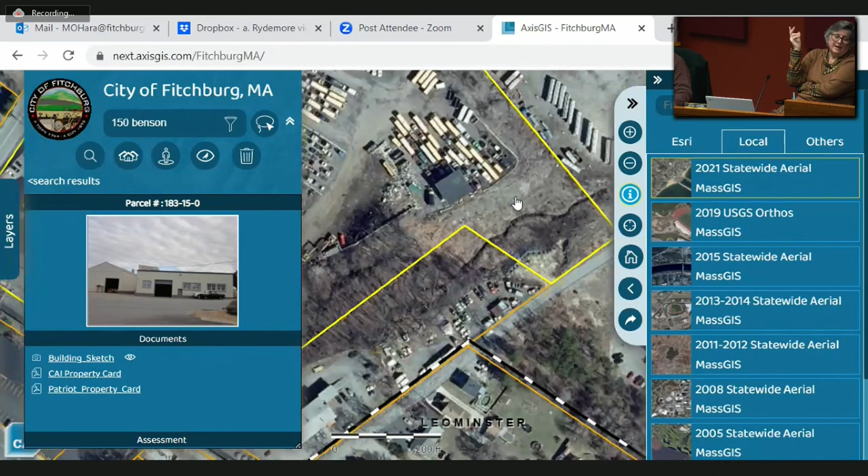So when I leveled that, my original intention was to fence that off as well, so people would stop bringing stuff in. So as you restore that corner, that may be another option that might need to be added, because it keeps coming back on me as the landowner, and if I don't fix the problem, who is going to? Because it's been like this for years.

Was there a gate? There was never one. The property that abuts it, which is CJ's, that's fenced in. But that property where I have, there was never fenced in, to the best of my knowledge.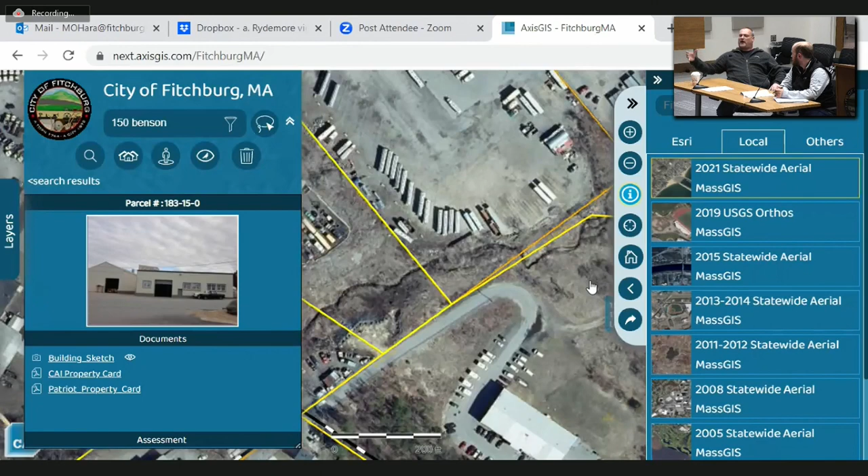There's a post sticking out of the ground, which you can see, which is buried. That was always there, so I think at one point there might have been a chain or something, but since I've owned the property, it was never chained off.

As part of your restoration of that side, we'd have to see where the grades are, check into it. I'm willing to work with you and look at that. I just need a little bit of time to put the whole thing together. Honestly, this time of year, if it gets cold, we're not going to be digging this out till warmer weather hits.

The use and access has changed now with the rail trails. So it used to be vehicular access, and that will be no longer. People are still using that, going down there with dirt bikes and vehicles, just so you know. They are still doing that, we see it all the time. So enforcement of that - I mean, indicate a gate. That's all, clean it up.

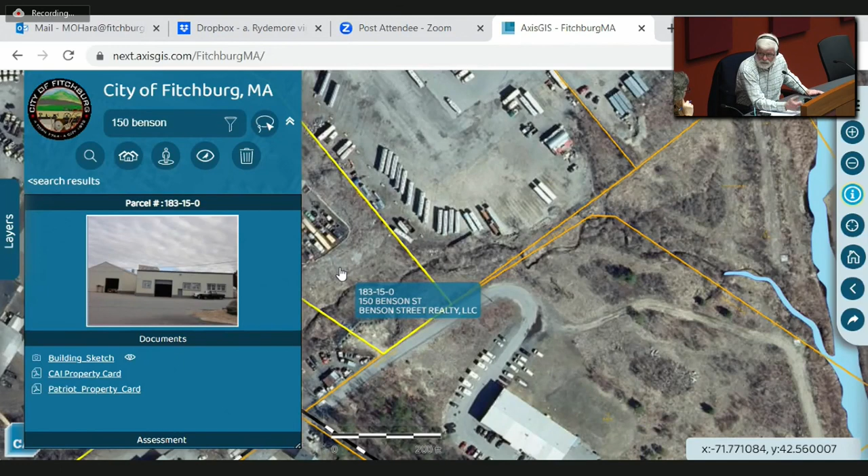So that's, at any rate, I guess. But here again, I don't mind helping out, because I don't want people looking down in there thinking that it was my people plowing or pushing stuff over there. I'd rather put up something if that's going to help a problem than continue to have any problems in the future.

Mike, what we may want to do is, if we're going to get together for a site walk, hopefully with the full commission, to look at the Will Thompson Way area, maybe on a Saturday morning, while we're there we can go look at the rail trail and the brook, and by that time Tracy and Brian will be back. It'd be more constructive if we could get everybody there in person. And we would like Tracy's input on the project.

Just so you can see, while we have this up on the screen, 150 is Rydemore. The adjacent property further downstream, here's that little tributary, is another property altogether. The name just did pop up - isn't that Zach? Yeah, Zach. Blanking on the last name. And then that's the cultivation facility here, and this is still city land.

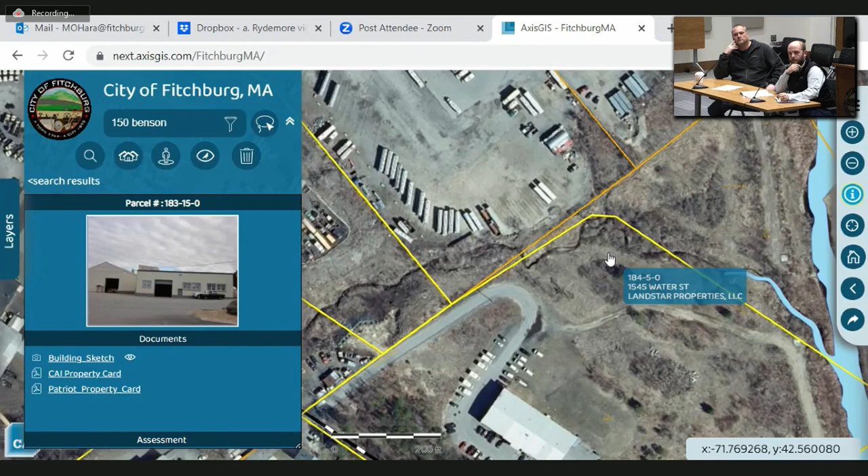Could you give me a week's notice possibly? Because I travel in and out of town for business all the time, so I want to make sure I'm available. Can we maybe try for either January 14th or the 21st, on a weekend? Because I know our chairwoman's schedule is better on a weekend. First week of February I'll be out of town for the full week, so anytime in January, either the 14th or the 21st, is fine.

Okay, so that we can discuss it at the next meeting. Weather dependent, yeah, because everything's based on weather now. Justin, you could do that, so you could be there?

I can be there whenever. One item though - they have a pending order of conditions that's been submitted to DEP? The notice of intent, you mean? Yes. So don't we have a file number yet? We do have a file number, actually, because I got the email. So when this is continued, which I'm sure it is, there'll be a motion and second for that - it'll appear as the opening of the hearing on the notice of intent.

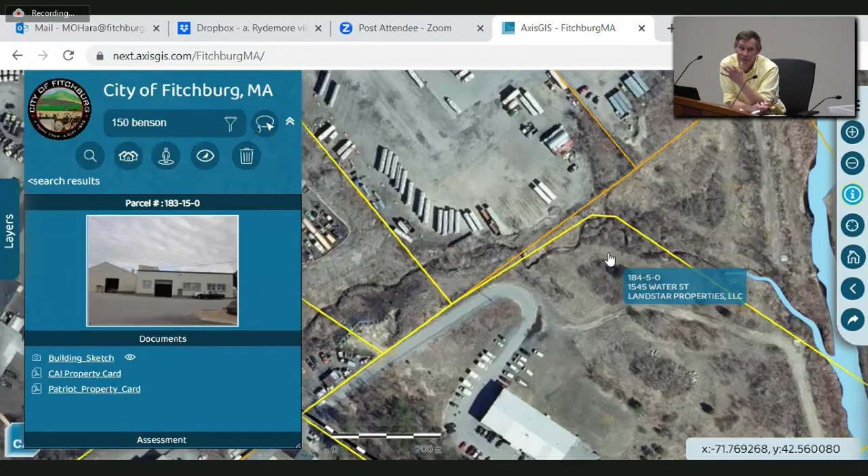I mean, how do you... yes, right, because we have the date window. So right now we're still working off the enforcement order, but if the notice of intent comes in, then we'll work off that at the next meeting, which will include both.

So if this is the next meeting, I guess a motion to continue to February 1st? Yes, motion to continue the enforcement order and notice of intent discussion after site visit till the February 1st meeting. Second. All those in favor? Aye.

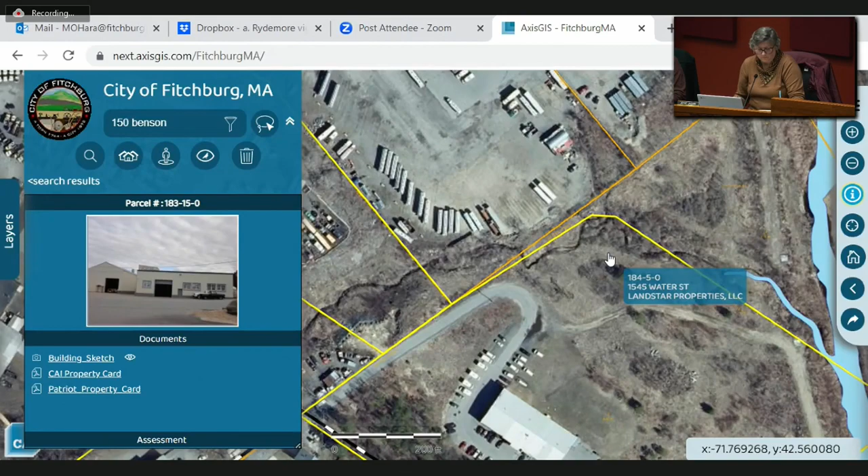Aye. Aye, sorry, okay, aye, fine. No, you're good, Mary, thanks for sticking with it. Okay, thank you gentlemen, thank you for your time. Thank you.

Next on the agenda is Woodland Estates, and I did see... Mike, these gentlemen are, oh I'm sorry, 642, so do we want to do that now while they're here? Sure, unless, do we have people online waiting? Well, I know John Barrett and Arthur Anderson are, I saw their names, but they're sitting in the comfort of their own homes. Yeah, okay, and I know these gentlemen here came up from Worcester, so...

Good evening, thank you to the Commission for your time and for hearing us tonight. I'm James Cunningham, I'm the Managing Director of Cunningham Equities. We're the owners of 642 River Street, Turning Point Campus. We purchased the property approximately a year and a half ago.

We were uncertain of the entire scope of environmental remediation, but knew we needed to invest significant time and monetary resources for asbestos, hazardous material, underground storage tanks, mercury, and other remediation efforts, which by and large today have been done. We're big believers in knowing the rules and playing by the rules. All our work is overseen by Williamson Environmental, our registered LSP, and since acquiring the property we've brought it up to compliance with all Mass DEP RTNs.

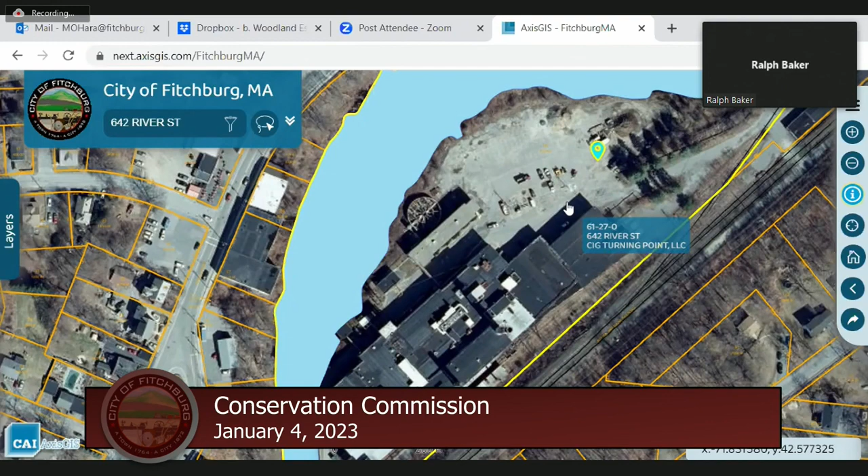Which is apparently quite a potent fungicide. And when I looked that material up, it has clear toxicity and a lot of indications that it's particularly undesirable in aquatic systems and to aquatic species.

So anyway, it's all water under the bridge because it's been released, and there's nothing we can do about it. But I disagree with the LSP's view that it was a non-reportable event, given this component, which is clearly not compatible with a water body like the North Nashua River, which we are bound to protect. That's it.

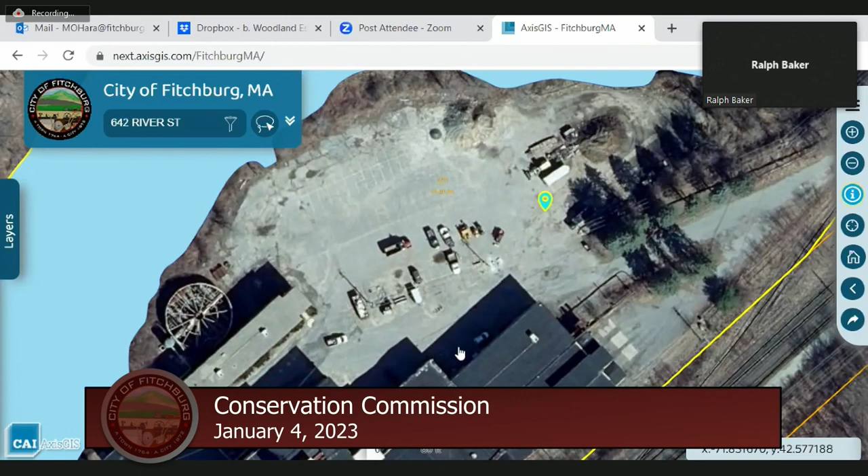Thank you, Ralph. So it had not broken up at all. The pictures I have were from December 7th, and on that day there was still residue where every nook and cranny of the inner side was visible. It hadn't dispersed at all by then, and that was 4 days after the washing of the brushes.

There's nobody here that can determine the volume of the release. But the roofers aren't here, and they released it. The roofers aren't here. Okay. But there's a few things I'd like to address.

One is, did you look at the price of Henry's roofing material? It's pretty expensive stuff. I believe you would say you don't know how it got in there. When I talked to the roofer when I was on site, he said his guys were cleaning it. It looked like it was in the parking lot. It was raining pretty good. I don't know exactly what happened.

However, I do know we own other mill buildings, and we've done a number of dye tests. I'm sure you've seen the dye test where you take a little bit of dye. Over in Clinton, we own a mill building. We took 2 tablets, or an ounce, of green dye and dumped it in a culvert to see where it ended up, and it ended up in the Nashua River. It turned the whole river green. We did it in conjunction with the DPW, but 1 ounce of that turned the entire river in front of Main Street green.

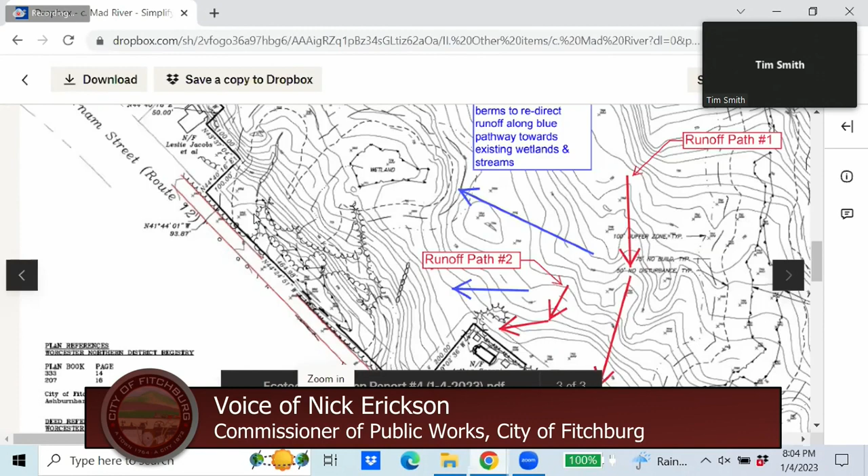Okay, last week, would that work? If it's open — sorry, Eric. Competing priorities, you know? Yeah, I get it. It wasn't your job, I think we pawned it off on you. If the commission could come up with a number, as absurd as it might be, it's a number, rather than delay.

Well, John, if I could ask you, how imminent is the start of construction on the solar array? I mean, are there any concrete plans? I think the construction of the solar array, Mike, is probably quite a ways off yet. Certainly the remaining restoration work, remediation work, has to be somewhat postponed until we get drier weather again, as I understand Arthur's report.

Certainly, that stuff will have to be fixed, and I want to assure Mike Donnelly that that will be dealt with before we start the solar construction.

Number 13, I had no problem. I was just bringing it to your attention that we're looking forward to that. That was number 13, and we jumped back again. Number 14 was about the bond.

I'm satisfied with 13 because it's in our control. But 14 right now hasn't been addressed, and I'm looking for a dollar amount and a time, and I look to my Conservation Commission members to chime in.

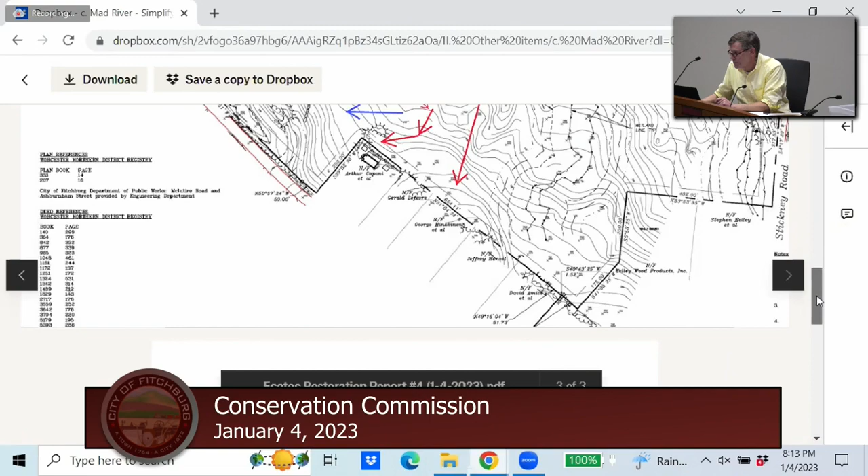I think what Arthur's report suggests, at least, is that with the runoff diversion work, hopefully there will not be a repeat of what happened to, is it Mrs. Garcia's? Yeah, it's Deborah Garcia. Deborah and Julio Garcia. And I would, if I could, through Mike and the commission, get your information and your phone number, Deborah. I can hopefully be in touch with you too for any things.

But in terms of what was happening, as you may not be aware, things were basically in a hiatus there through the summer. The decisions were issued in about the middle of October, and then work began shortly after that.

But the work was restoration work, not so much the type of runoff diversion work that would have attended the construction of the solar facilities there. I'm not sure exactly how the two need to be done, I think they have to be done in concert. Certainly, before any erection of any solar facilities is going to happen, the other diversion work would have to be done according to the plan. But I think what was going on mostly this fall was the remediation work as far as the effects on the wetlands. And obviously this heavy rain event did point up the fact that the other work needs to be done.

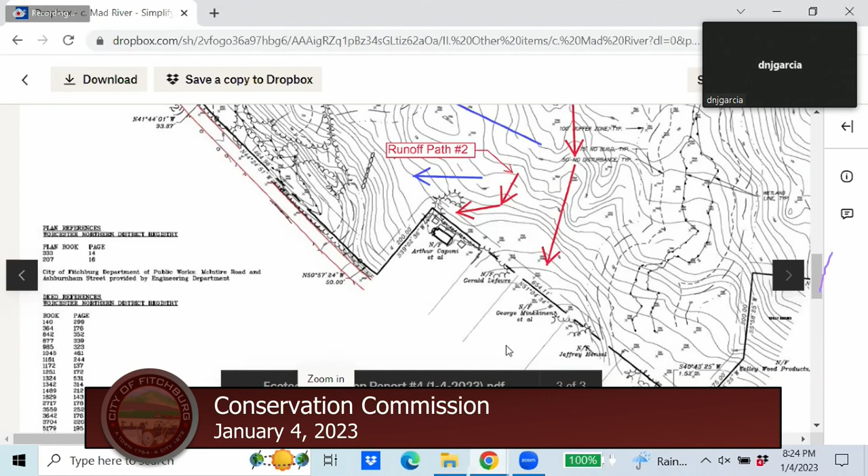Okay, John, in the interest of time, let me suggest, Arthur, if you want to contact me, the next time you go out there, give me a ring and I'll meet you. And Deborah, if you're still there, I have your email address since you used it to sign up for the meeting. I'll send you a note and we can exchange numbers, okay?

And maybe it could be— can I visit with Mike? Is that what he's saying? Yeah, unfortunately my speakers are not that good. I can hear it, but I don't know if you can. Art, yeah, Mike's asking to coordinate a site visit with Mike, yes.

Okay, good. Do other commissioners have any comment, in person or virtually? I just don't want to use weather as a rationale for any slowdown of work. Perhaps rain, yes, but weather in general, whether January 4th.

The other day, Amazon will put in multiple dozens of foundation plantings. I was surprised as heck, but by hand, with a pointed shovel, they were installing multiple dozens of foundation plantings. So the work that's up there, there's plenty of time without any snow cover to get plenty of work done and to take care of that drainage issue.

This is Ralph. I would add that the drawing that we were looking at is really inadequate. They need to provide a much clearer presentation of what they've done, please.